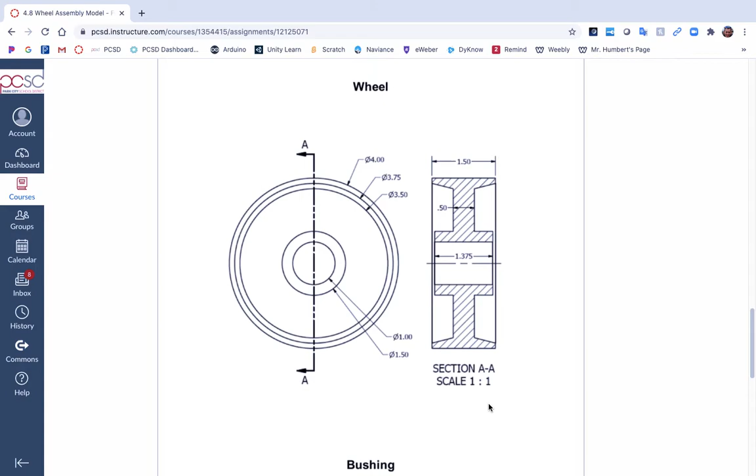Depending on what order you model these in, it would be the last video, or not. The wheel video. Okay, we want to build this wheel in Fusion. So I'm going to zoom in so I can see it as best I can. And I'm going to make sure I have Fusion open over here. Okay, looks like I have a new workspace ready to go.

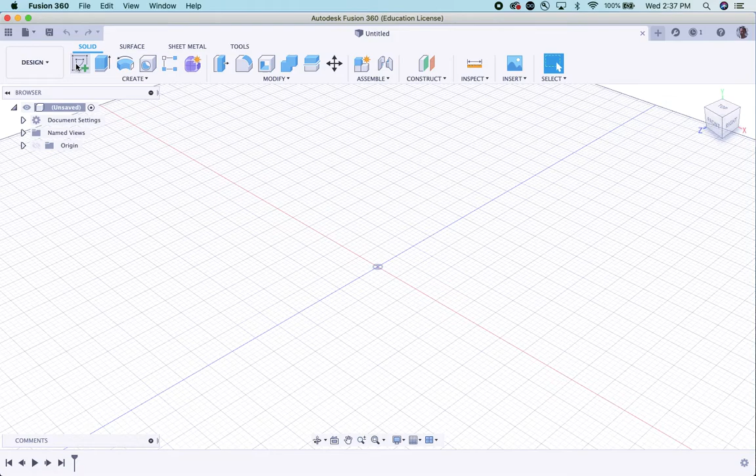So again, you're going to want to use this sketch mode, okay, not form mode for this. We're going to do a sketch. We're probably going to, well, let's look at this. There's different ways you could model this. You could model a circle and extrude it and extrude it and extrude it, but you'd have to make a modification in here because of this angle. Remember, extrusions are only like perpendicular to the sketch.

So I think a better way to model this wheel is to use the revolve tool. And so what I'm going to do is draw this half of a wheel in sketch mode, put in that center axis, and then revolve this shape around the center axis to end up with this 3D wheel. Okay. Maybe backing up a little bit, let me explain this drawing.

This is called a section. A section is a slice through an object. Okay, so this is section AA. This line shows you where the section is taken. It's right in the middle of the wheel, and it's looking that way. So here's section AA, okay, to orient yourself. Anything that's hatched or shaded, this is called hatch, this pattern. Anything that's hatched like that represents that it's solid and it's been sliced through.

All right, and what else? This white space in here means that that center part is a hole all the way through. Okay, that line is like the back part of the hole that you're looking at, the edge of this like thickened piece, which is right here. Okay, and as we build it, it'll make some sense.

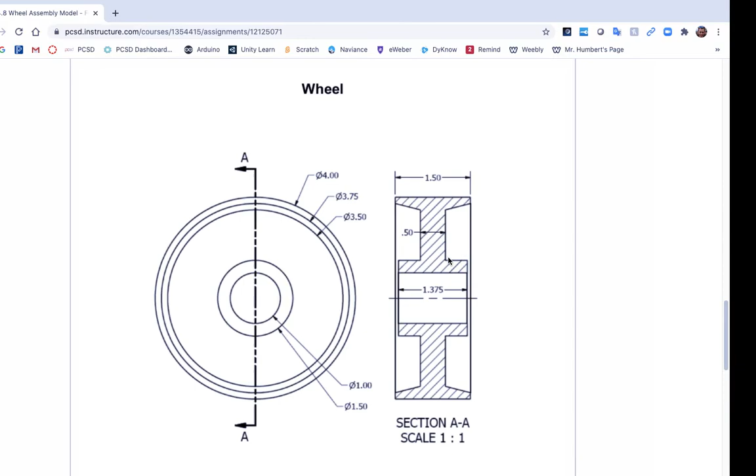So I think it's 1.5 inches from there to there. And then 1.5 inches from there to there is 3. And then this hole is the other inch, which makes 4. So I'm going to draw a 1.5 inch by 1.5 inch square to start. Okay. And then we'll just kind of construct this. So we're going to do a sketch, pick a plane, and draw just a 1.5 tab, 1.5 enter square. Okay, that's the easy part.

Then this is 1.375. This is 1.5, so there's a difference of 0.125. Okay, and then this, maybe I can draw this piece. That's that piece. I'm seeing 1.5, which is a 1/4 inch here and a 1/4 inch there. Okay, remember 1 inch plus a 1/4 inch plus a 1/4 inch equals 1.5 inches. So this is a 1/4 inch, that line right there.

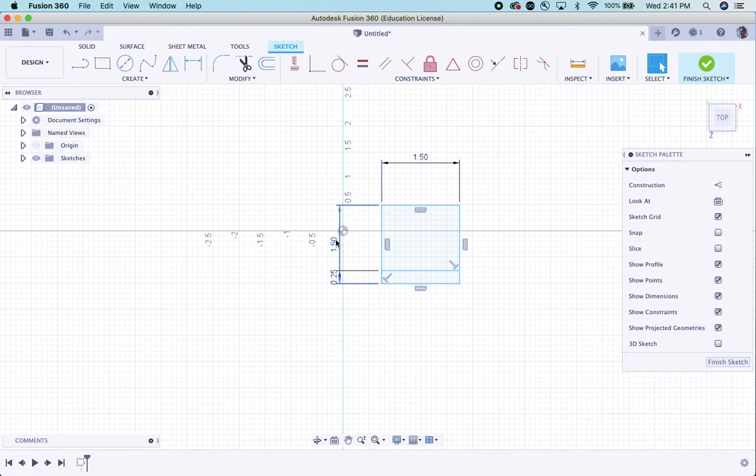So I'm going to come over to here and I'm going to go up 0.25, enter. I'm going to go across and snap it perpendicular to the other side. Okay, and I'm going to just escape a few times and I'm going to delete these dimensions as I go, so I think they're going to get confusing. So far so good. I could draw this just axis of rotation.

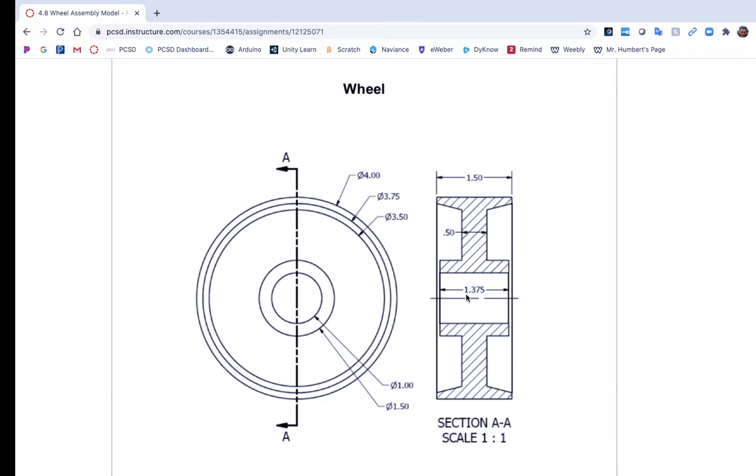Okay, I know that that circle is 1 inch, so the halfway to the circle will be a 1/2 inch. So this distance is just a 1/2 inch. So I'm just going to do a random line 0.5 away. Okay, so if you right click, you can repeat the line tool, and I'm going to just do a line like that. And then I'm going to delete that line, delete that. This is just going to be there to rotate my shape. Okay.

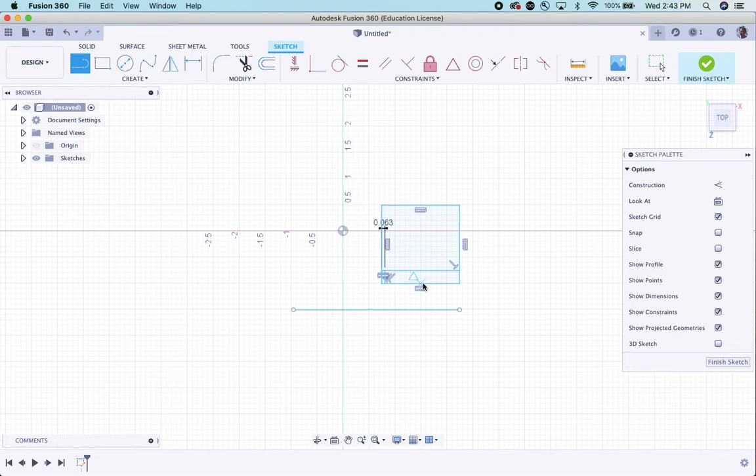Let's skinny this up here so I don't forget later. This is 0.125 less than that, but again, it's half on this side, half on that side. I know 0.125 is 1/8, so if I move this line in 1/16 on both sides, I'll be getting there. So I'm going to go from here, I'm going to go in 1/16, enter. Then I can go repeat line, and I can just do a line from here down to there. Okay, and there's my 0.063, and then I'm going to do the same thing over here.

I'm going to go line tool, 1/16, enter, and then I want to do another line. So again, you can repeat line if you right click from there down, hit escape a few times, clean it up. Okay, delete that.

Then what you can do is, I don't know if I can delete this line. I guess I can, but see this line I can't delete, this little bit of a line. But I can use the trim tool, and I can just trim, clean it all up. Oh, I trimmed the wrong piece over here somewhere. So I'm Command Z. I want to trim that little bit, that bit, and oh, I think I want to keep that.

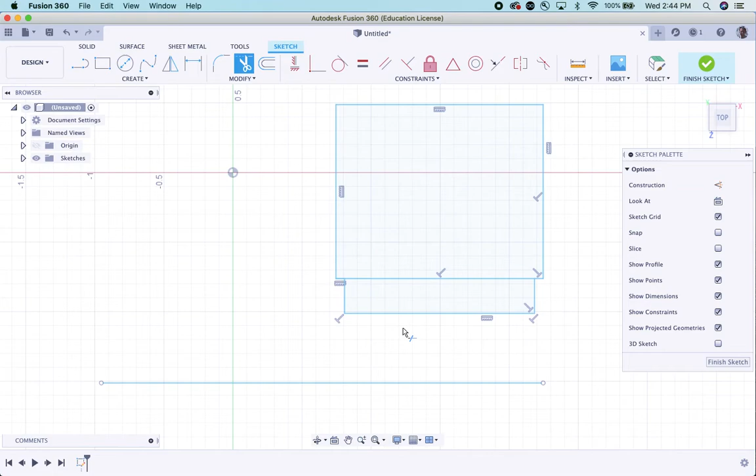So I actually don't need those lines, I don't think. I'm not entirely sure about that, but I'm pretty sure this is going to go up, this is going to go in, okay? This is a 1/2 inch. This is 1.5 inches, so that means that we have a 1/2 inch from here and a 1/2 inch from here. Okay, so I'm going to do a line from here, in, 0.5, enter.

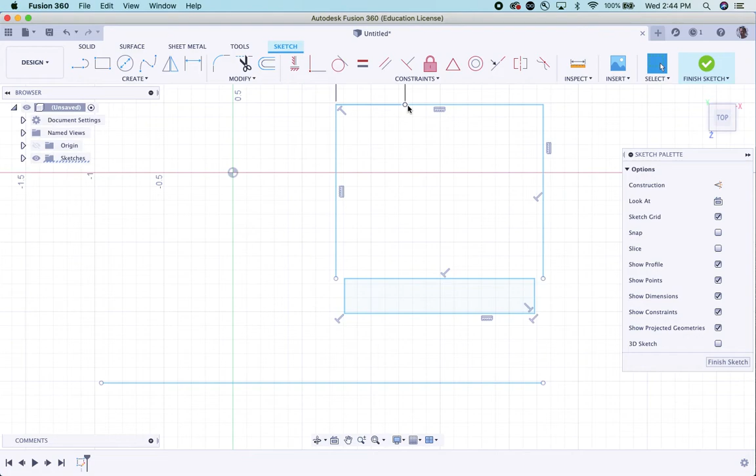Right click, repeat line, from there all the way down, make sure it's perpendicular, and I'll do the same thing again. From here, make sure I'm horizontal, 0.5, enter, repeat line, from there all the way down. I'm going to hit escape a few times. I'm going to just delete my dimensions as I go. I'm going to use my trim and trim that. And now we're starting to get what we want.

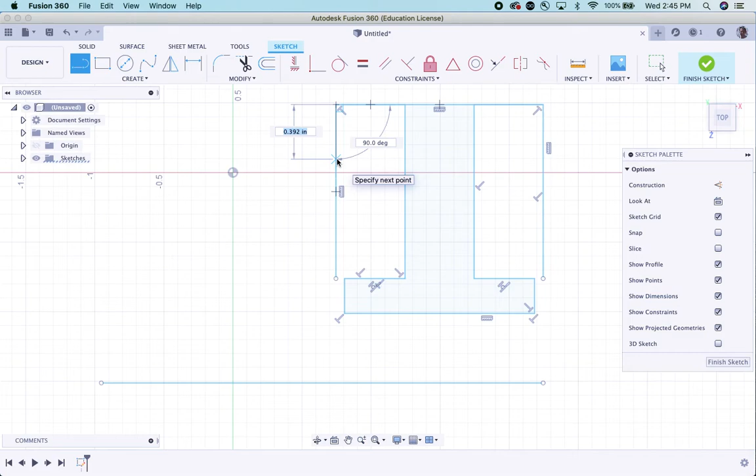Okay, next line. The difference between the very top line and the next line is not 0.25, it's half of 0.25, because the other half of the 0.25 is down here. So if I want, I can literally just go from here, and I can make the distance 0.25 divided by 2, enter. 0.125. Okay, then I think it's probably faster to draw a line to there.

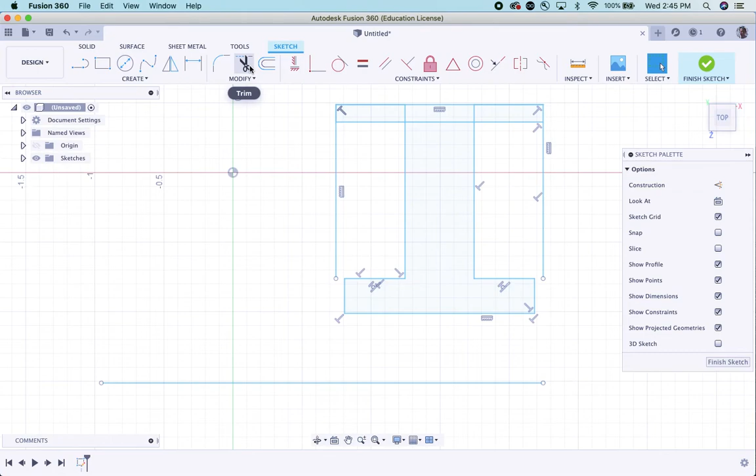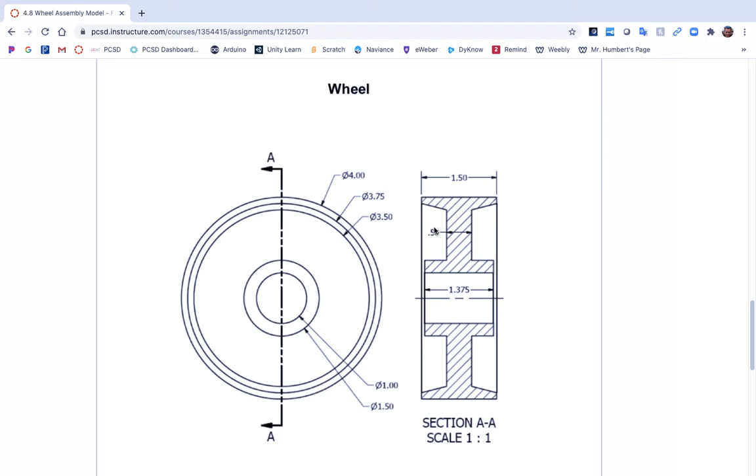And now I can delete, trim, delete. Okay, starting to look right. We just have to get this angle here to work. Another difference here again, from there to there, 0.25, which is half of it up here, half of it down there. Okay, that's going to be like this angle bit. And if I go into here, I remember that this is

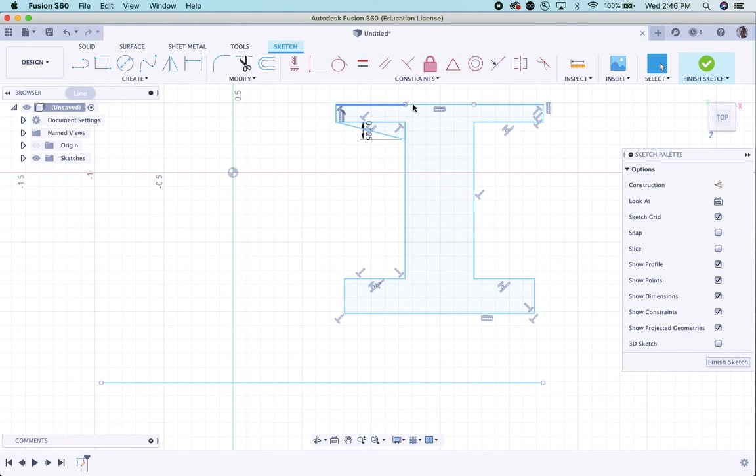0.125. So you could take a line from here and go down 0.125, enter. Then you can repeat that line and go from here back up. Okay, then you want to probably delete that. You can delete that. You've got to trim that. Okay, and that's getting there. Another way, I wonder if I can do this.

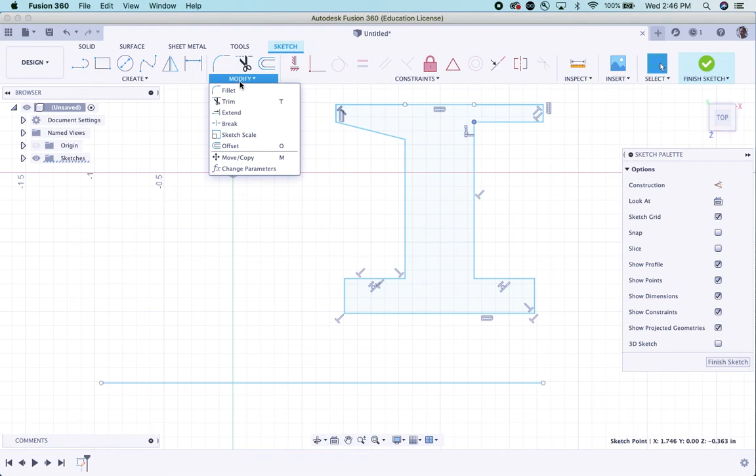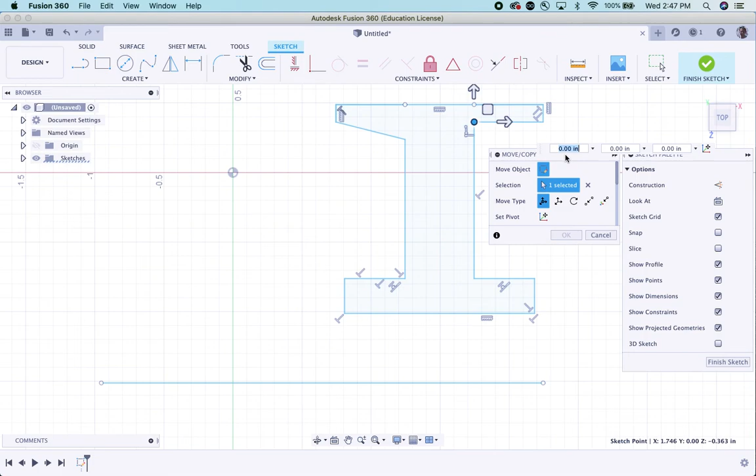Can I pick this dot and move it? I don't know if I can. Move. Okay, look at this. I can move it. 0.125, but that goes up. So see, I could do that. This is going to go up, so if I click it and I go negative 0.125, no. See, and eventually I'm going to say, forget it. Let's just draw a line.

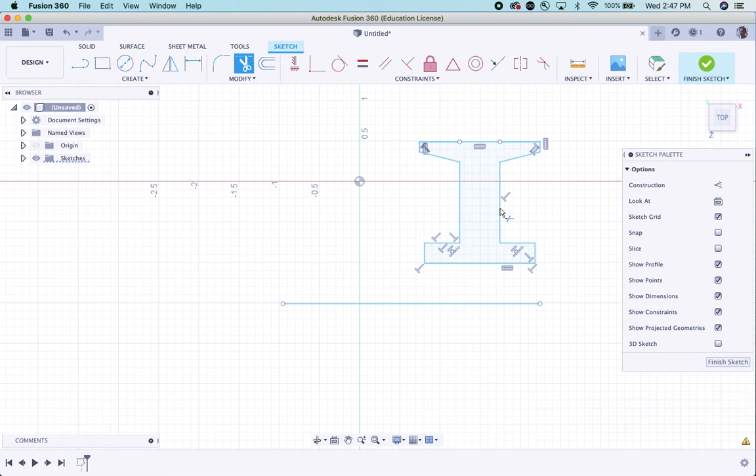And then I can do another line from that intersection up to there. Okay, take the trim tool and just trim, trim, trim, and I have my wheel cross section. Okay, I can ignore this warning because I didn't need those constraints anyway. So I'm going to finish my sketch, and then you want to use the tool we haven't used before, the revolve tool. This is used to do many shapes that you can't build in any other way.

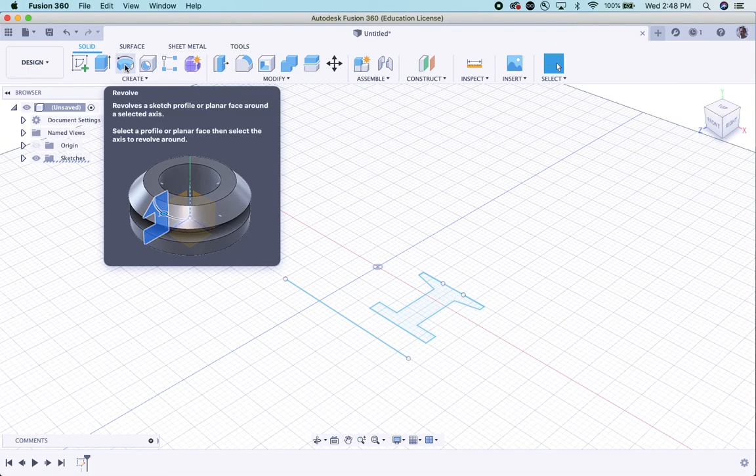You can see the example there. They did a cross section through that. Looks like a bearing, and then they told it what the axis was that you revolve around, and you do it. So we're going to do it right now. Okay, it says profile selected, axis needs to be selected. Okay, if I spin it around a different axis, it'll do different things. I'm going to pick this axis, and then you can even change your angle. See, so if I go like 15 degrees, it only revolves it that much.

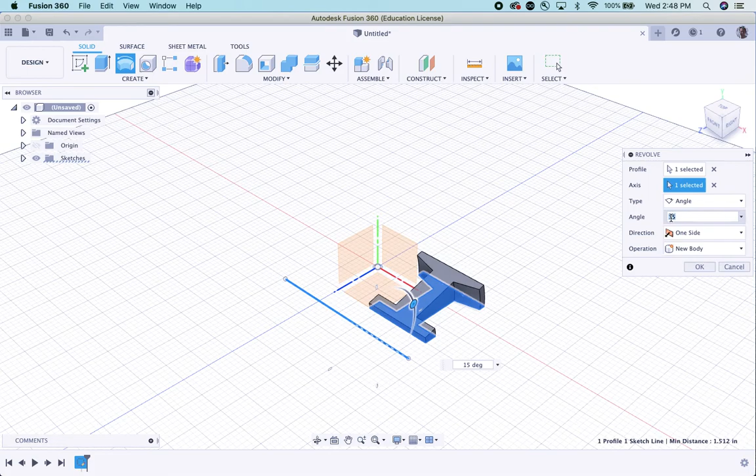If I go 90, in this case we want to go 360, and you get a whole wheel. You can even choose other things here. I pretty much do it the way I showed you. So here's my sketch. There's my axis of rotation. 360, hit OK, and there's a beautiful wheel. Okay, if I hit the home view, I can navigate around, make sure it all looks correct. There's a hole all the way through.

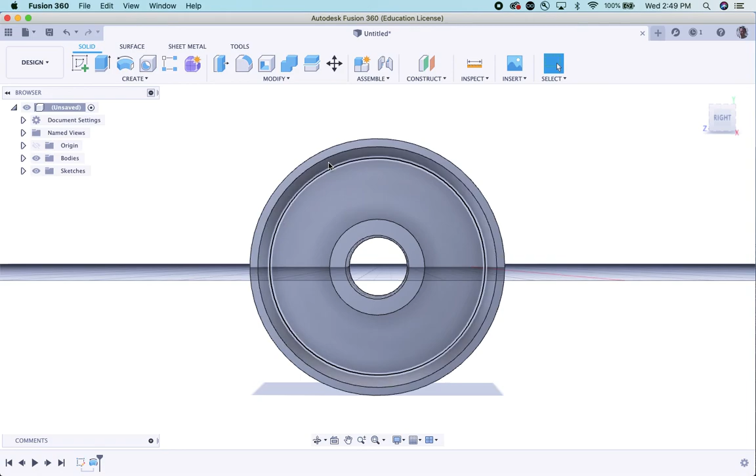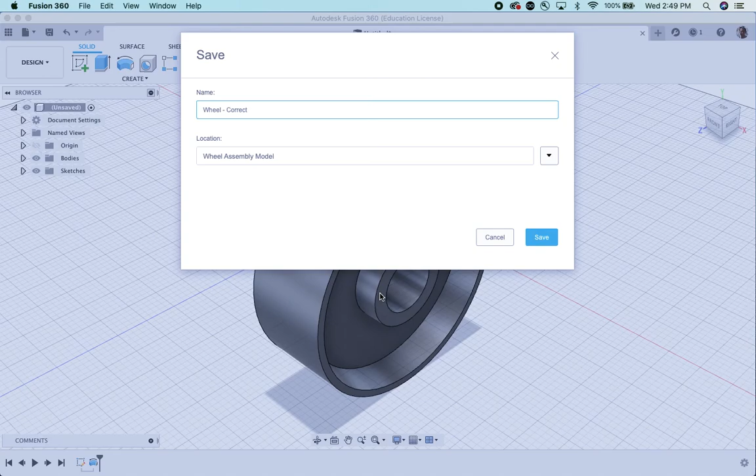Notice on side view that it's kind of skinny, with some foreshortening because of perspective view. Thicker. If I do this view, you can see how the middle part is recessed from the edge. So that's it. There's our wheel. I'm going to save it. Back to my wheel assembly model. And I'm actually going to call it correct, because I think the first time I modeled this, I forgot to recess this middle part. So I'm going to save it in there and delete the other wheel.

So see, I've got wheel correct. Once that's done, I'm going to go in here and I'm going to right click and delete it. And then I don't know if I can rename this while it's open. Enter. Oh, I guess I did. It works. Okay, so now it's all ready. So now we have all our parts for our wheel assembly model.